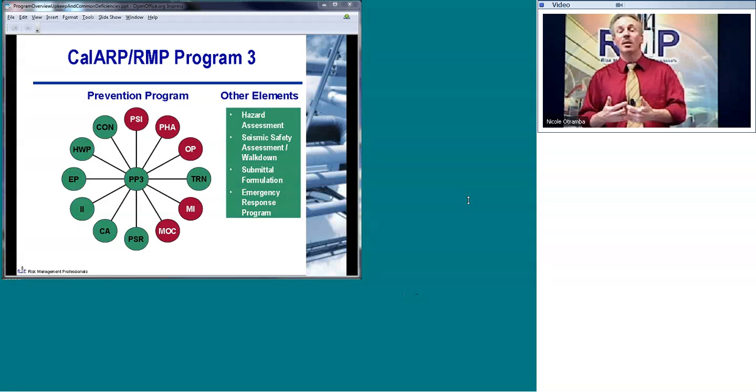I've also taken the liberty of highlighting certain elements in red that tend to trip people up most often: process safety information, process hazard analysis, operating procedures, mechanical integrity, and management of change are the things that get people into trouble the most. And we're going to go through all these elements and identify common deficiencies and things to really look out for, very common elements that trip people up and result in citations.

There's a significant overlap. In fact, recently I co-authored a paper with some of my colleagues here that provided an overview of the evolution of safety management system programs, starting with a lot of things that happened in the 70s and really came to a head with the Bhopal accident in 1984. And if you look at the evolution of what came out of that, the Center for Chemical Process Safety, which I had the honor of serving on for a few years, putting out their technical management guidelines for process safety, API Recommended Practice 750, and then finally in 1992, OSHA's promulgation of process safety management, and then in 1996, EPA's promulgation of risk management programs.

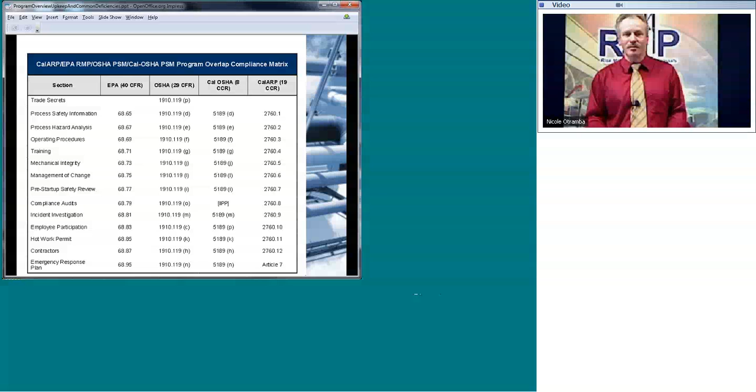I think it's worth taking a couple of minutes and identifying how we got here. Why do we have all these programs? A lot of you who may be fairly new to the process safety arena may not understand some of the background or the importance of these things. My actual foray into this field started in 1983 when I shifted from another group in Westinghouse to the process safety group, and we started applying a lot of these techniques even before the Bhopal accident or OSHA's promulgation of PSM. What you're really looking at is very significant events, catastrophic events in many cases that result in losses of many lives or significant impacts on the environment.

And whether you're talking about Bhopal in 1984, or the more recent Deepwater Horizon accident in the year 2010, a lot of things have occurred that have resulted in significant events, significant business impact. And it's really clear that there are fundamental flaws in many of those cases in how the application of safety management systems to manage the safety at the facility was actually done.

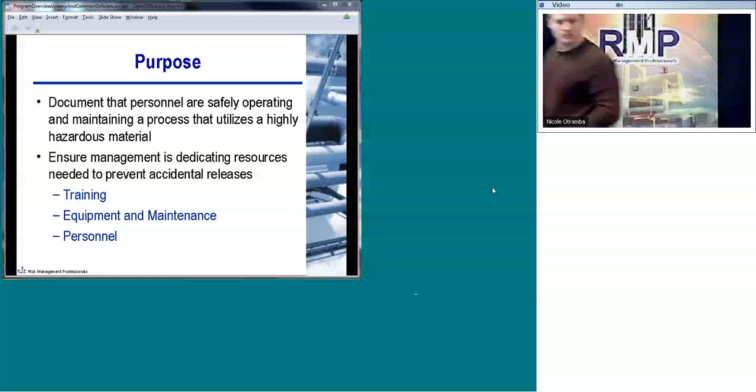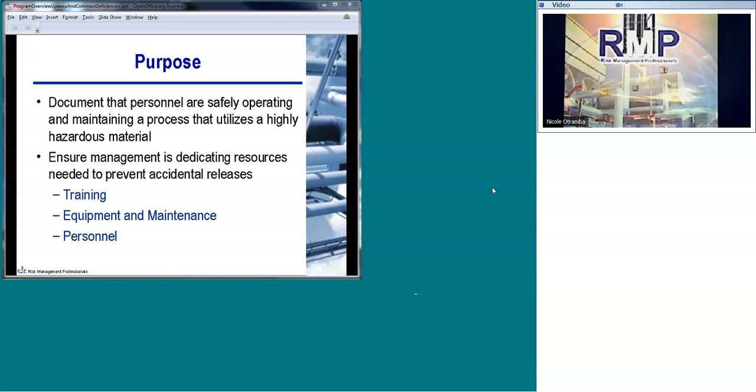Let's get rolling again. There's a mission here. All of the folks who are tuning in, if you're responsible for your programs, it's important to keep up with the programs and really for this primary purpose of protecting employees, the public, and the environment, and making sure that you're getting the necessary resources to do that from a training, maintaining equipment, and also personnel perspective. And that's what we're going to be focusing on today. So let's talk about upkeep requirements first.

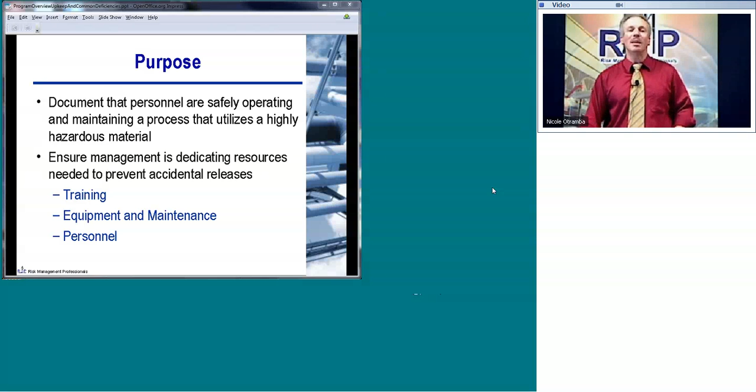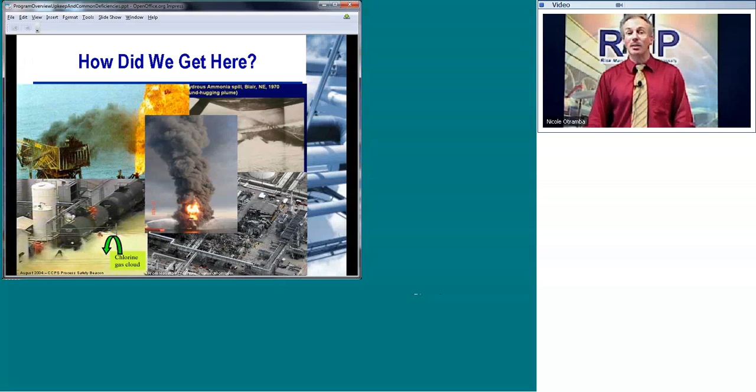Some of the key periodic requirements are every 5 years. As I mentioned, there's a requirement to resubmit. We'll also talk about some caveats where there may be some more frequent requirements under certain conditions. Every 5 years, you must update or review your hazard assessment to make sure that it's applicable. There's a requirement to review and update as necessary your hazard review, and that's the term used for program 2 for the fairly simple techniques, or the process hazard analysis if you're a program 3 facility. You're also required, if you're in California and subject to the CalARP program, to do an external events review, primarily seismic, as we discussed, with various guidebooks for seismic safety assessments, but you also must consider other external events.

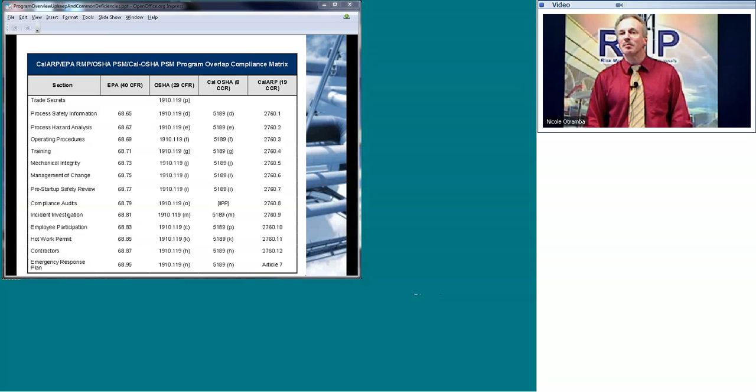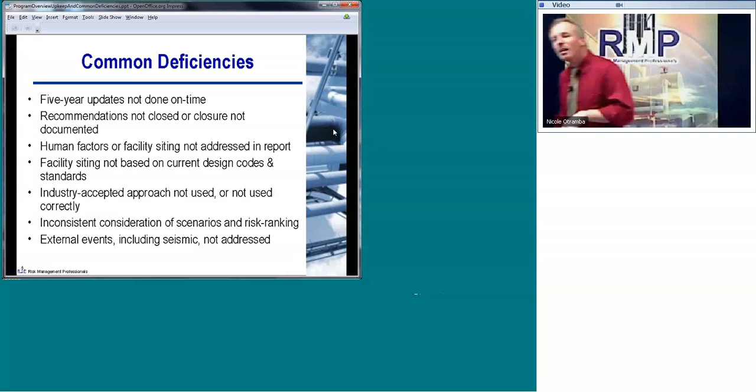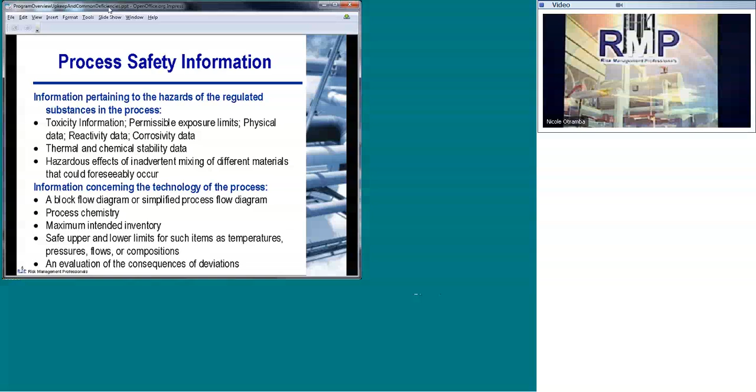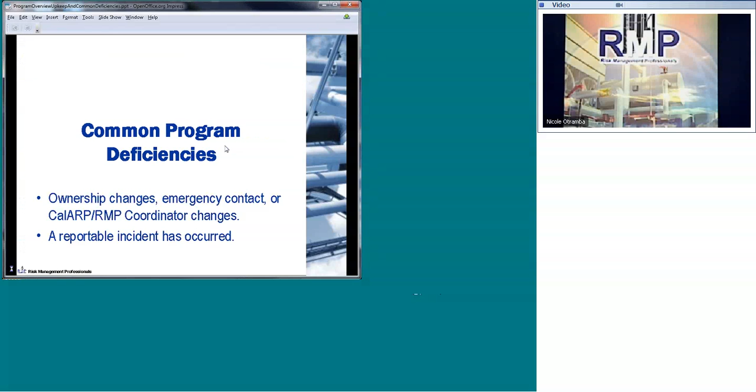Some more problems, Nicole? Well, the sound's okay right now. For some reason, your stuff's different than the one I have. So far, I've been able to find all the slides, but I don't see that slide. And I grabbed it from the February 24th folder drive. So I don't know. Are you? I'm going to go off mic for a second. Okay, we're going to take another 30-second technology break. Excuse me. All right. Are we live? Yeah. All right. Right now, hopefully you're seeing the same slide that I am. And hopefully your room is a lot cooler than ours. We seem to also be having some temperature problems here right now.

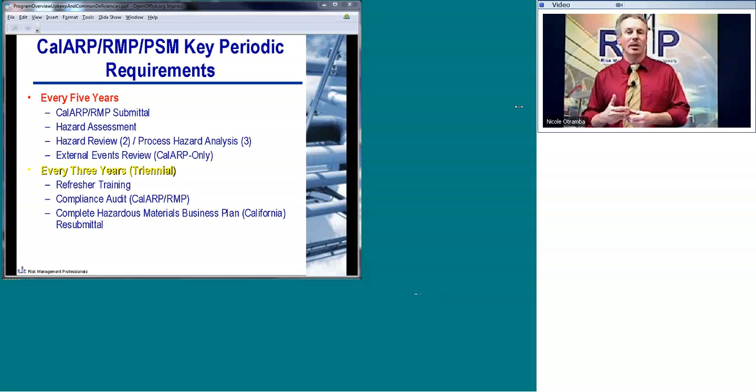Every 3 years, you need to make sure that you're providing refresher training to key personnel. As performance-based standards, they don't tell you exactly what training or exactly who needs to be trained. That's something that you need to define as part of your training program to make sure it's effective and meets the requirements and objectives of these performance-based standards. Compliance audits also need to be done every 3 years.

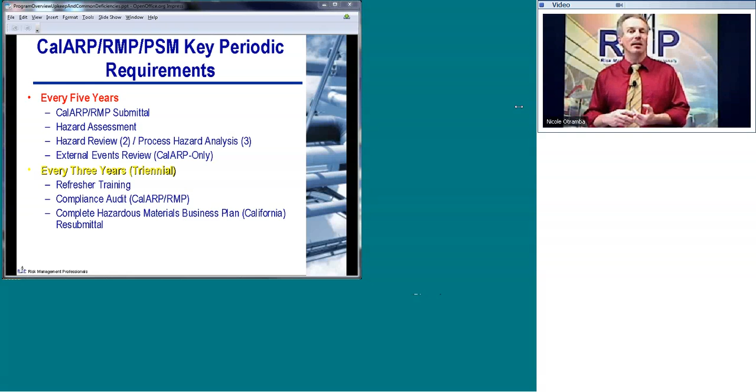A lot of people get confused and think that, oh, my regulators showed up and they did their compliance audit, so I guess I don't need to do mine. Not true. If a regulator shows up, they've got their own mission. They can show up for half an hour and do a quick walkthrough. They can stay there for 30 days and do a detailed assessment.

But that's still their mission. It's your responsibility to monitor the health of your program and make sure things get done. That's the objectives of the compliance audit.

It's on a 3-year cycle, which is totally different from the 5-year cycle that's being done for hazard review and process hazard analysis. So even if you just updated your CalARP RMP submittal last year, if your audit was done 2.5 years ago, it's time to start thinking about auditing your program and making sure that you've verified the adequacy of implementation and that it's effective.

And also in California, there's a requirement for hazardous materials business plans to be resubmitted on a triennial basis. Annually for these programs, operating procedures need to be reviewed and certified as adequate. Emergency action plans or emergency response plans, they also need to be updated. They certainly need to be reviewed. The timing is a little bit looser, but best practices, and there's some general requirements for updates on an annual basis. And also hazardous materials inventory updates may be required on an annual basis.

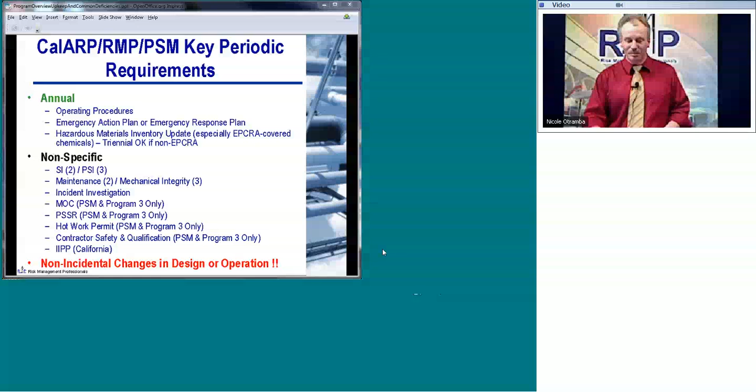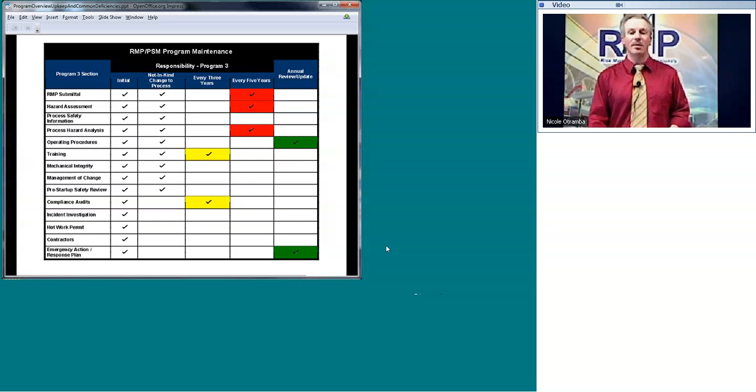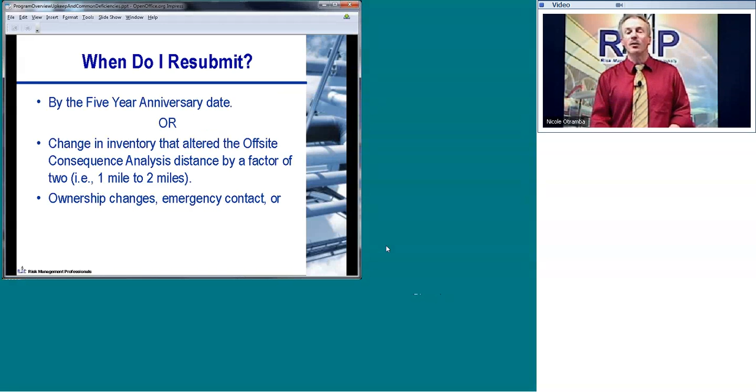So let's talk about the different elements and some of the common deficiencies associated with those that you'll want to look out for. First of all, for the submittal, you want to make sure that the submittal gets done by the anniversary date. If there's a change in inventory that affected your off-site consequence analysis by a factor of 2, you're also going to have to do a resubmittal. Ownership changes, emergency contact points, CalARP, RMP coordinators, the EPA, your CalARP coordinator, and your local CUPA want to know who to talk to, who to contact in an emergency. So as those things change, they'll need to be promptly notified.

A lot of these things have a 6-month clock. For a lot of these things, the amount of effort to change them is fairly small. You'll definitely want to be responsive. Keeping your CUPA happy, keeping them informed is a good way to maintain that positive relationship that will help improve things at your plant site and make it easier for these regulatory programs. And of course, if you have a reportable incident, you may have to do a resubmittal.

Let's talk about the hazard assessment elements. The off-site consequence analysis for Program 2 and Program 3 facilities includes worst case and alternative scenarios. Only the worst case scenario needs to be looked at for Program 1, but we're not really focusing on that for this presentation. And in general, you'll want to use EPA-approved dispersion models for hazard assessment, and make sure that you've got a report where you can find things and update them fairly easily.

What just flashed on your screen is a little picture of RMP Comp. That's an EPA-approved software package, very easy to use. And although it tends to overpredict consequences for toxic gas releases and also for flammables, it's EPA-approved and certainly errs on the conservative side. So if it works and if it doesn't impact what you do at the plant site, why fix what isn't broken? It's very easy to use, and it's, like I said, very defensible.

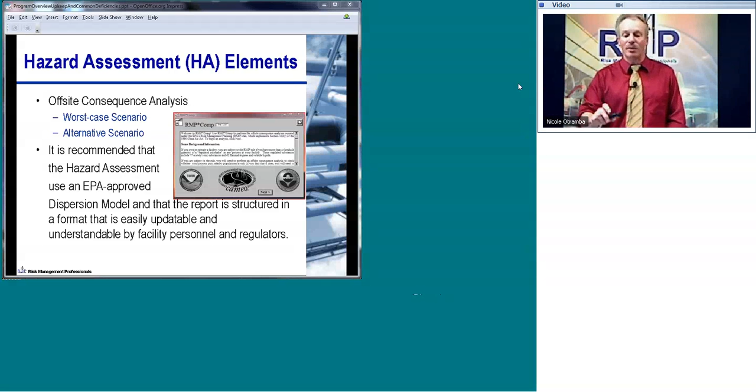So let's take a look at some common deficiencies here. Not getting the submittal done, that's pretty basic, but a lot of people, the dates slip. At the plant site, they have a change in coordinators. The new person comes in, they put PSM or RMP coordinator in their resume. The hiring manager gets them in, and they're all excited. They got a PSM coordinator. A lot of times people don't know what they're doing, and they're getting into this kind of fresh. And if they don't have all the records, if they're not watching what's going on, it's really easy to miss these submittal dates.

Also, not having a management system in place. Having specific written assignments of responsibility is critical. That's one of the things that people are going to look for if they come in to audit your facility. If a regulator comes in, they're going to want to know who's in charge of programs and how you are monitoring that the things are getting done.

For the hazard assessment, common deficiencies: not documenting your basis for scenario selection, and also failing to update populations, sensitive receptors and maps on revalidation. Those are common deficiencies, real basic things. They tend to slip through the cracks, and a lot of people tend to miss them.

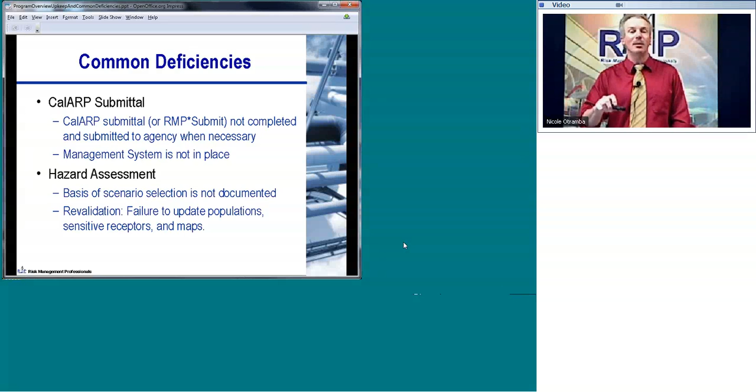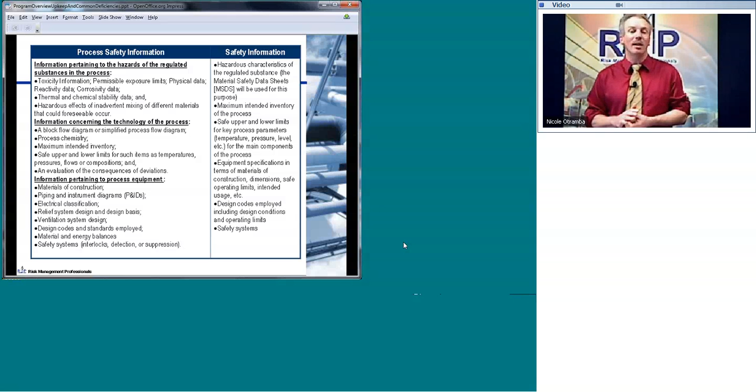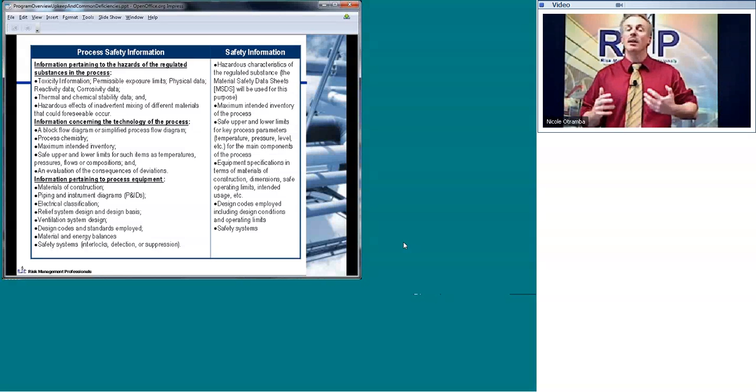Other process level information: materials of construction, P&IDs, electrical classifications, relief system design and design bases, ventilation system design, design codes and standards that are used, material and energy balances, and safety systems that are applied in their design bases. These are things that are very fundamental. A lot of times they don't change a lot, so once you compile them, you're in pretty good shape.

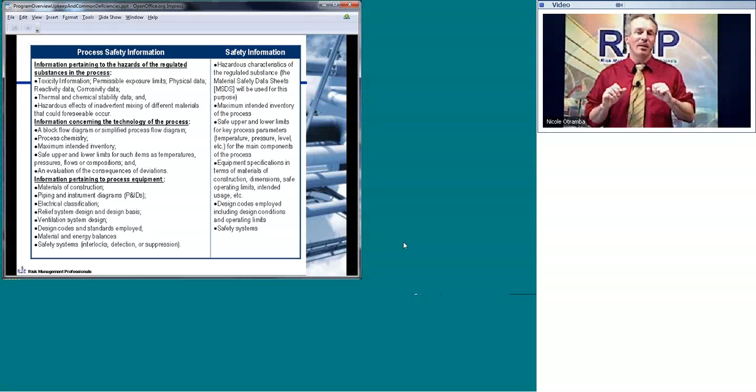But if you change out a relief valve, if you redesign, repipe your process equipment, you may need to revise set points, operating procedures, P&IDs, or anything else that is associated or has in it key process safety information. So you need to have a management program for making sure this is updated so the people who need this information have it and that it's current.

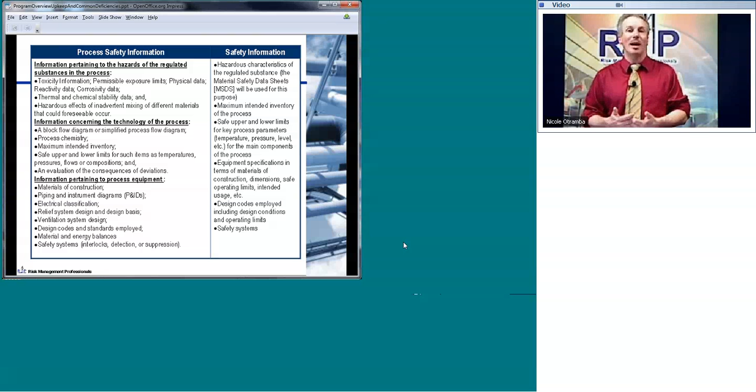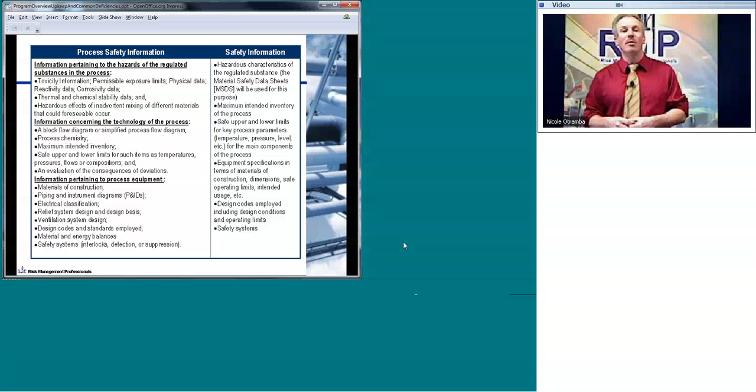Keeping up with this stuff for many facilities where changes are being made can be very non-trivial. It can require a lot of effort. If you're in charge of managing these programs at your facility, try not to underestimate the amount of your personal time and/or resources that may be necessary to keep up with these things.

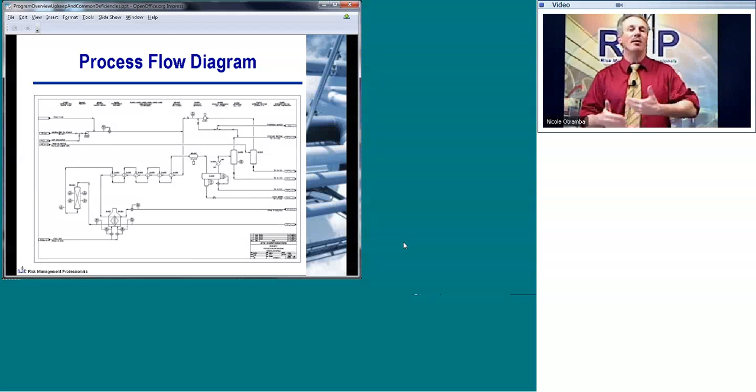A couple of quick examples that I put in your package of a process flow diagram. It's meant to give somebody an understanding at a glance of where all the hazardous materials are, general inventories, types of equipment they're in, and how this process works. In more detail, P&IDs, and I provide you with a little example there, they have more information about set points, component IDs, design pressures, etc.

A lot of people ask, well, what goes on a P&ID? In fact, we've actually given frequent P&ID and process safety information classes that we've done by webinar and also in person. A lot of people do ask these things, but it really depends on what you need.

And you've got to decide at the plant site, although there are a lot of standards, there's ANSI standards and things like that that allow you to determine what goes on a P&ID. It's really meant to be the embodiment of the kind of information you need when you're evaluating hazards at the facility. And that's where the rubber meets the road, is what goes into a P&ID. It should encapsulate all that basic information so that if you're doing a process hazard analysis, most of what you need is in front of you in a form that shows the interrelationship of these various safety characteristics.

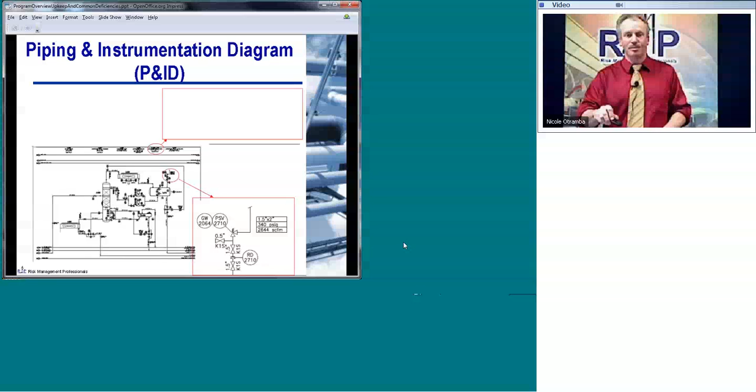Common deficiencies associated with process safety information. P&IDs not updated, not there, not reflecting changes that have been made to the system or are not complete. I have to tell you that after doing this for 28 years, kind of, sort of, I have never seen a P&ID that's 100% accurate. Now, usually when I start a HAZOP study or a process hazard analysis, the minor errors are small enough so it really doesn't affect what you're doing or the ability of the team to work on it.

And one of the spin-offs of the PHA or HAZOP study is actually marking up the P&IDs and getting these folks together to make sure they're current. This is very important to be done right. It's a critical part of your process safety information. It's hard to do. A couple minor glitches here and there probably are going to be inconsequential.

But you know, if you're having complete missing drawings, if they're totally inaccurate, or you didn't field verify them, and you start your PHA, I can guarantee you that you're going to spend more time and aggravation and wasted effort, especially if you're hiring a consultant to come in and facilitate your HAZOP study, in trying to work around big chunks of missing data than if you just spent the effort up front and updated the P&IDs.

Second bullet, not filing, managing, or being able to locate key process safety information. Regulator shows up at your plant site and they want this stuff. If you can't find it easily, they've got to ask, well, how valuable is that? How much is it used? How good is it in terms of its effect on your program? Relief system design or design basis not documented, that's very common. Easy citation there, and a lot of times they don't change very much. It's just a matter of filing it properly, being able to locate it.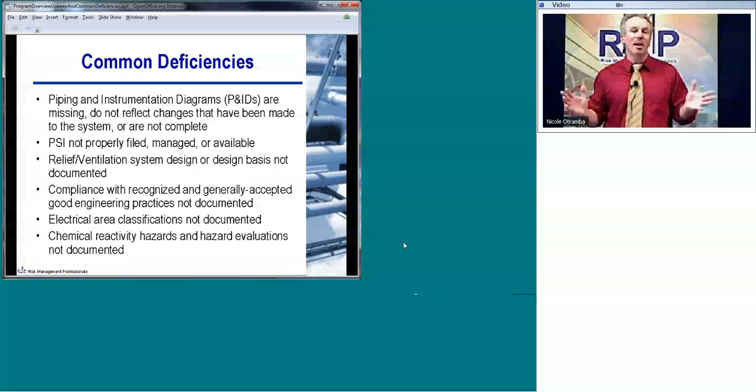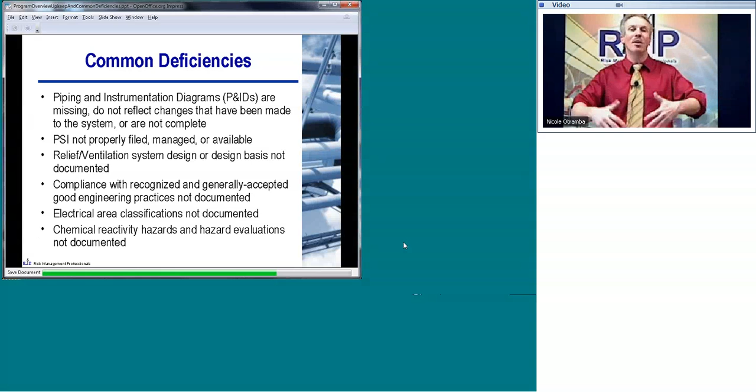For all this process safety information and various elements, we usually recommend, or we set up for clients, an electronic universe, if you may, of something on your local area network where you've got certain directories that are key to these various elements of PSM and RMP and CalARP, where all this stuff is pigeonholed. If you've got large copies of paper documents, gosh, an accident, somebody misplacing them, accidentally throwing them away, you want critical information scanned and also archived electronically, and good backups made of these electronics. Even though it's a lot to do, there are ways to handle this properly.

And again, we usually recommend doing something that makes it very easy to find and also archives it very thoroughly. A lot of things that we do too, most of you use Microsoft Office as an interface. It's really easy to set up an HTML hyperlinked front end that actually links into these documents. And gosh, if the regulator comes in and you can put your hands on this information very quickly, they're going to feel real good about your program, and your audit is going to go a lot smoother.

Fourth bullet, compliance with recognized and generally accepted good engineering practices has to be documented. Electrical area classifications not being documented is very common. That's something you may want to get on top of. And also chemical reactivity hazards, if they apply to you, and also various hazards not being documented.

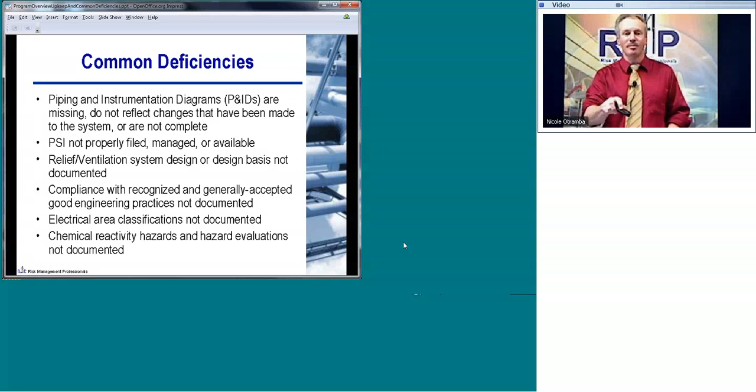So what I'd like to do with all these, and it's a little difficult to do with a webinar, is run through a quiz that we would give if we were doing this at a plant site and point out a couple of key elements. Process safety information being up to date prior to conducting the process hazard analysis, absolutely true. You want to make sure this stuff is up to date. Any effort you spend beforehand in field verification, double checking the drawings, and making sure P&IDs and other PSI information is up to date will save overall time and effort in the long run. Second item, material safety data sheets can be used to meet all process safety information requirements.

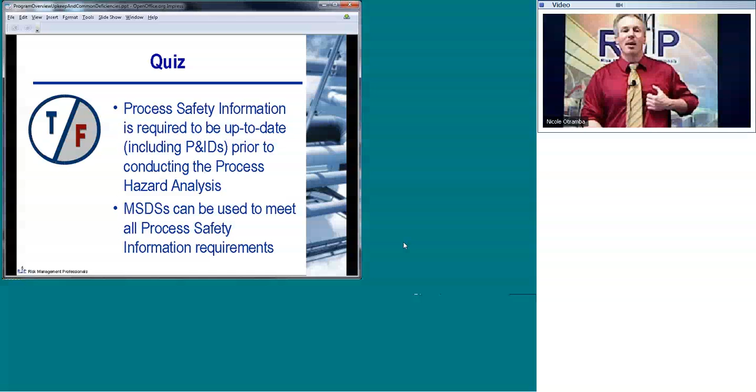Absolutely false. MSDS, good information, but it's just one element of a lot of the things that are required for PSI. So let's talk about the process hazard analysis and hazard review. PHA is for Program 3, hazard review for Program 2.

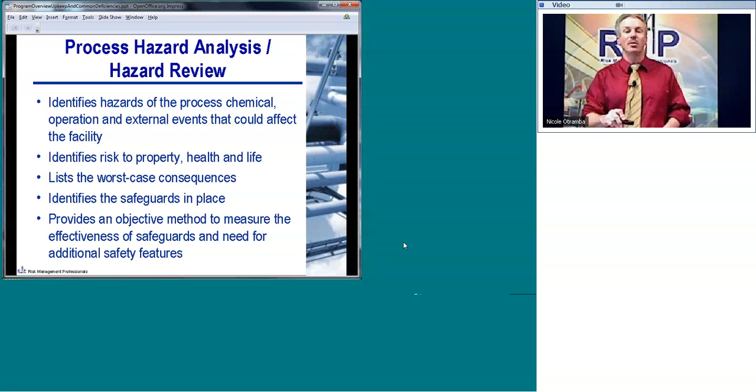Objectives: identify hazards of the process chemical, operation, and external events that can affect the facility. Look at risk to property, health, and life. List the worst case consequences, identifying the safeguards that are in place, and making sure that you've got an objective method to measure the effectiveness of those safeguards and make a determination for additional safety features. These are usually done as part of a team.

Now, the type of approach is very flexible. I've put together a spectrum of the kind of PHA tools that you might see applied. On the left, you'll see things that are much less effort, but don't really yield the insights of more complex tools. Less effort, fewer insights for a simple process may be just fine. So if you get a very simple process, a what-if approach or checklist approach, it may be just fine.

If you got a more complex chemical process, something like a HAZOP study, or if you're trying to make the tough decisions on the adequacy of your safeguards, even applying a layer of protection analysis or limited and focused applications of quantitative risk assessment like fault trees or event tree analysis might be very useful. I used a lot of conditional words there. In the wrong hands, LOPA, fault trees, quantitative risk assessment can be a nightmare. If it's focused and meant to address specific problems and specific decisions, they can be very helpful and very effectively applied.

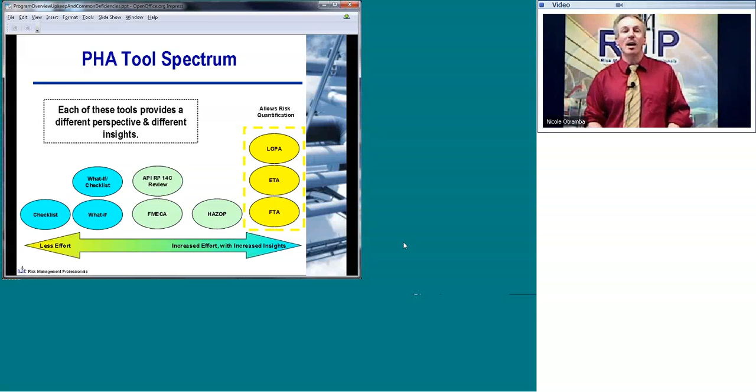Okay, common deficiencies for the PHA. Not doing 5-year updates on time. A lot of times, too, people play games. A PHA might have been done in February 1993 and documented, and the report's dated in August 1993 because somebody got busy and didn't do it right away. Well, August 1998 is not the time for your next update. You really need to key it on when the team meetings were done because that's the encapsulation of when you actually did the analysis. So making sure these 5-year updates are done on time; it's an easy citation and easy for a regulator to check if it's not done.

Recommendations not closed or closure not documented. If you've got a recommendation from a team in terms of how to improve safety and you don't follow through with it, like I mentioned the term smoking gun before, it's an easy citation that can be picked up to have open action items like this.

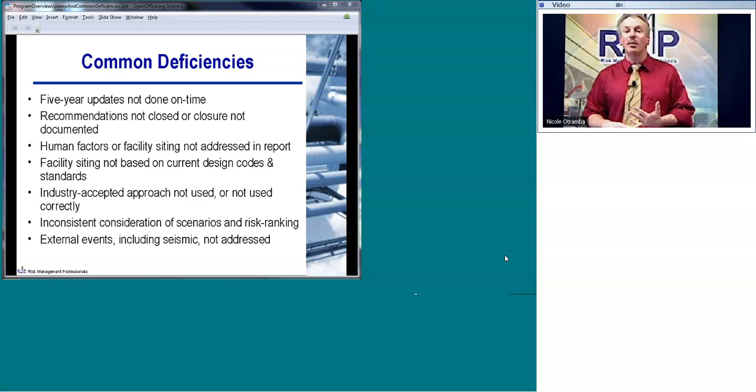Human factors, facility siting not addressed in the report, facility siting not using current design codes and standards, not using an industry-accepted approach for your hazards analysis, inconsistent consideration of scenarios and risk ranking, or not risk ranking at all, is something that a regulator will often pick up on, and also not addressing external events, and especially for California seismic, that's a common deficiency.

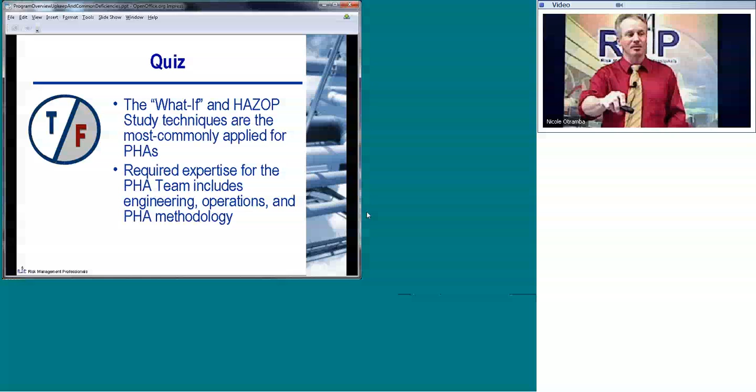Other things to think about for PHA: closure of the PHA recommendations is the responsibility of the facility, and the auditing agency would typically not be inquisitive as to status. Well, two parts to that. First part is true. The closure of recommendations is the responsibility of the facility. You're not waiting for the regulator to show up and verify and have that person help you close recommendations.

And when they do show up, they are going to be inquisitive, very much so, as to what you did with those recommendations. Coming in from the outside, they're not going to know as much as you do about your program, about your plant, so they're going to want to rely on what a team of experts identified, what conclusions they came up with, and then how you handled those findings.

Second bullet on the slide, PHA revalidations are required at least every 5 years. That is true. A revalidation, a minimum 5 years if nothing's changed, more frequently and maybe even infused into the management of change process if there are a bunch of changes.

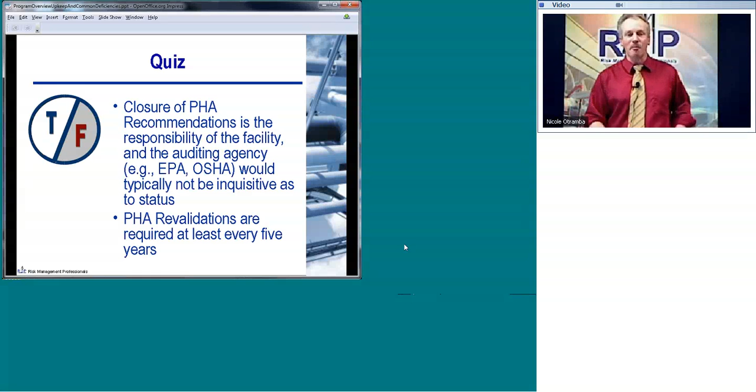Let's talk about operating procedures. There's a number of procedures that are necessary to handle different operating modes. Initial startup, normal operations, temporary operations, emergency shutdown, emergency operations, normal shutdown, and startup following turnaround. All these things need to be addressed at your facility.

Now, can you combine them? Can different operational steps apply to different operating modes? Absolutely. But not having these things identified and not dealing with them in the operating procedures, people wonder whether or not you really thought about it or are telling the operators how to deal with these kinds of operating modes.

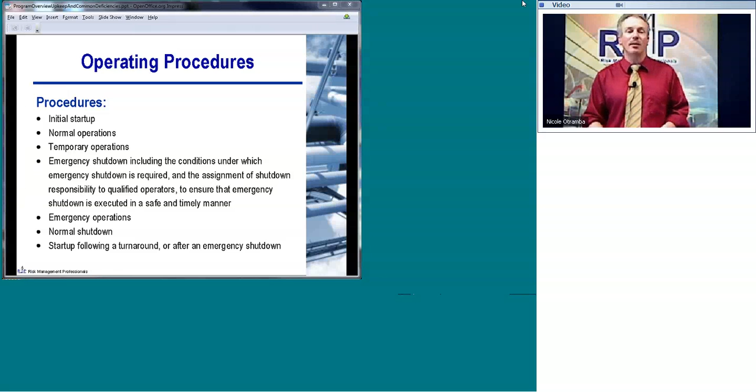Operating limits, consequences of deviation, steps required to correct or avoid deviations need to be included. Various safety and health considerations, like material properties, precautions to prevent exposure, and also various control measures if there is contact or if chemicals are released, are very important to include in operating procedures. These things are important and will be looked at during an audit by an outside agency.

Common deficiencies for operating procedures: the procedure is outdated, or you haven't performed your annual review and certification. Just reviewing it is one thing. Most of the time there's a sign-off sheet right in the front by somebody in a responsible position that it was reviewed and certified to be current and adequate.

Second bullet, written procedures not synchronized with operator actions. I don't know how many times I've been to a plant site and, when you're spot checking or looking at some of these key PSM elements, you get a copy of the operating procedure in your hand, then you have the operator actually show you what he or she does, and they're not the same. A lot of times the operator gets the procedure and goes, like, I know what I'm doing anyhow, and just kind of ignores it.

What you want to do is have the operating procedures capture those best practices from your personnel. Why do you want to do that? Consistent application of best practices is going to be safer. And from a selfish perspective, if you're a business, if you got an employee who's retiring soon, you want to capture those insights in how to operate it efficiently, effectively, and safely, and get them into your operating procedures.

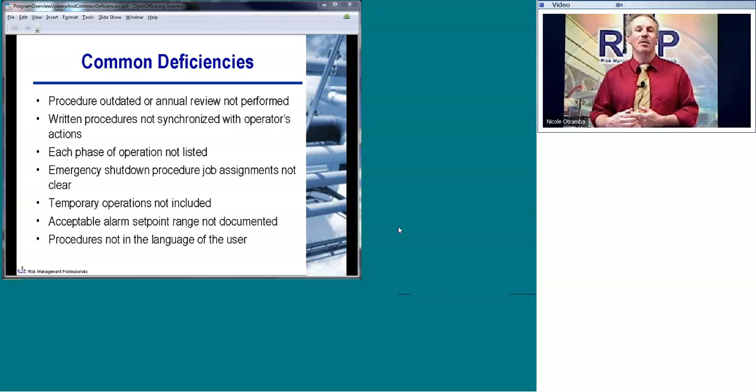Third bullet, each phase of operation not listed. Common deficiencies: emergency shutdown procedure job assignments not clear, temporary operations not included, acceptable alarm set point ranges not documented, or procedures not in the language of the user. Now, if you've got a bilingual or multilingual staff, do all procedures need to be in all languages?

No. What you need to do is verify that you're meeting this performance-based standard, that they understand how to operate it safely. That can mean that you keep the procedures in English and help them with their language skills, or it could mean that you may want a couple of different flavors of procedures depending on language requirements. In fact, we've done that at some facilities in California. Actually having procedures only in Spanish makes sense, and that's manageable.

So let's do a little quiz here. If there have been no changes to the system, there's no need to certify operating procedures each year. False. Whether there have been changes or not, you have to have somebody sign on the dotted line that they've looked at it and that they're adequate.

Contractors are not required to follow the facility operating procedures. False. A lot of times, contractors and plant personnel, other than the uniform they may wear or the Nomex they may put on, are basically interchangeable or doing very similar things. If the procedures need to be followed by operators, they need to be followed by contractors too.

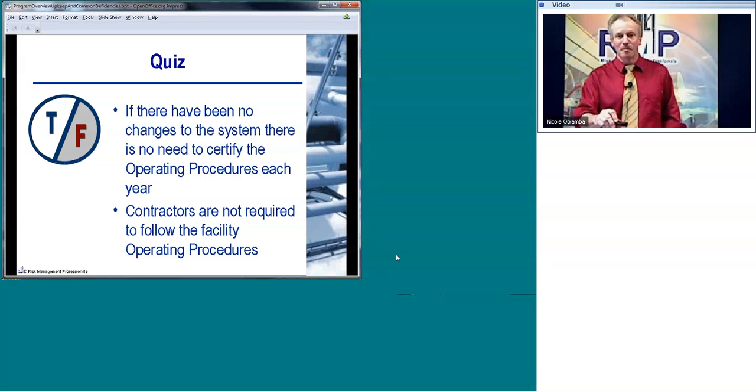Let's talk about training. Training has to address operating procedures and various safety, health, maintenance, and emergency response issues. You need to make sure that training includes safety and health hazards, emergency operations, safe work practices, safety systems, operating limits. And the records, let's keep that in mind. The records have to identify the individual who's trained, the date of the training, and how you verified that they received the training and understood it. Basically, comprehension training.

Common deficiencies for training: documentation that demonstrates that training is performed is not available. Auditors and regulators are going to be looking for that. You want to keep really good records of training. Training records don't include the means used to verify the employee understood the training. It's one thing to go through and send them to a class. Did they understand what was going on, or did they just sleep through it and not really get what was

going on? PPE, procedures and training documentation not available. Training not in the language of the user. Again, performance-based standard. Training, procedures, all these things need to be understood and acted on properly. And also training not encompassing maintenance procedures.

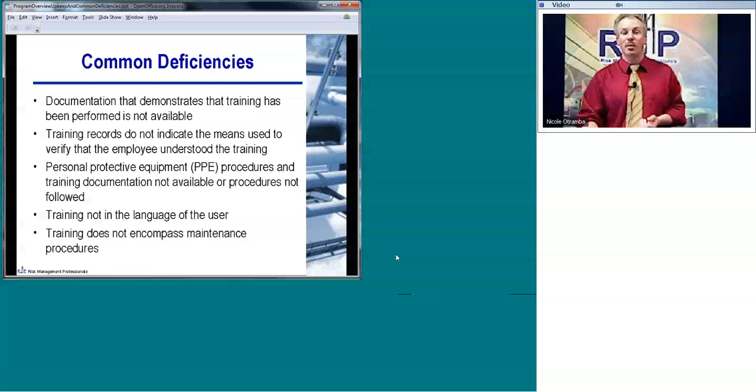Let's go over a couple of key points. Refresher training on the applicable facility operating procedures is required every 3 years. True. Training records should document the means used to verify training comprehension. Absolutely true. You need to have some mechanism. It doesn't have to be an extensive 5-day test.

It can be that they walk around the plant site and you're actually working with the operator and verifying by visual observation, and a supervisor or more experienced employee signs off. Lots of ways to do that for a performance-based standard, but you have to have some mechanism that you validated is adequate.

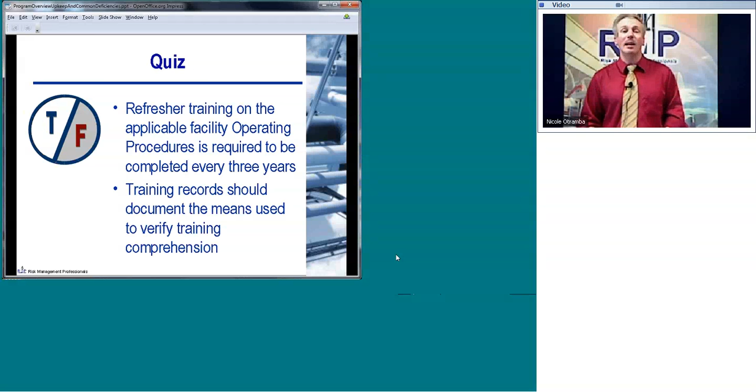Let's talk about mechanical integrity programs for Program 3 or maintenance programs for Program 2. All of these describe the process and safety equipment, preventive maintenance activities, and inspection schedules. So inspection, testing, maintenance, key things that are necessary for all these programs.

One of the things you can do, you can go home and have your sprinkler system in your yard break or be operating sporadically. That's your business, and it's a low hazard kind of issue. For a highly hazardous facility, a fix-at-failure maintenance strategy is not acceptable. Well, it's not acceptable for at least equipment that's associated with the hazardous materials and/or critical safety systems.

You have to have some program to verify or validate how much effort is needed and when, and have a mechanism for going through it and verifying that it's reliable and that the equipment's available when needed. You have to have a preventive maintenance program based on manufacturer recommendations.

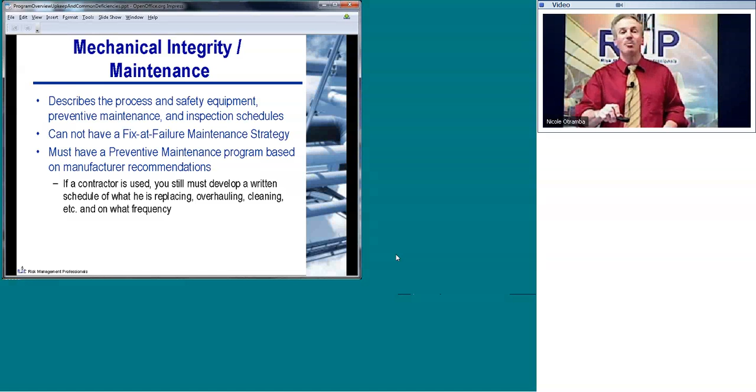Excuse me. And if you're using a contractor, you must develop a written schedule of what they're replacing, overhauling, cleaning, and at what frequency. So even as a facility owner, even if you task out maintenance, you've got to keep records and make sure they're doing the job properly.

This slide is a little busy. This emphasizes the fact that there's lots of ways to skin the cat here. There's lots of different mechanical integrity programs and how you implement it. Simple on the left is memory, freestyle. In a lot of cases, it's just not adequate anymore.

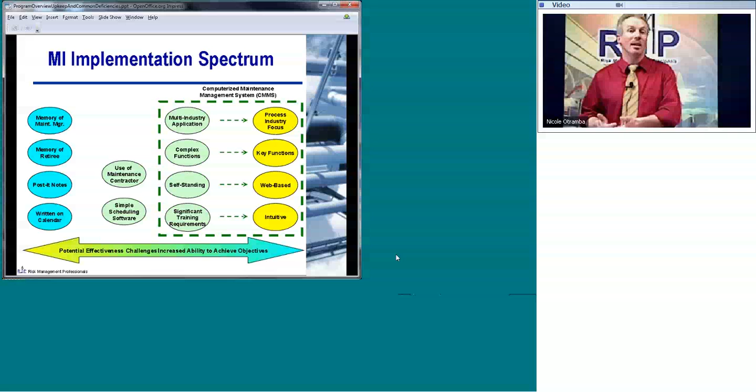On the right, you're looking at computerized maintenance management systems, which is where most programs have evolved into, and a lot of them are computers at the plant site, a lot of times using very expensive software. A lot of the more effective programs are web-based and retain the documents in an archive form and do a lot of hand-holding to make these things very easy.

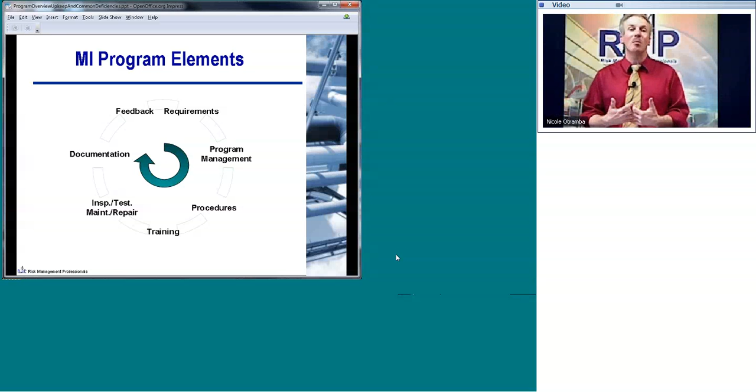On the other hand, some equipment that breaks down a lot and requires a lot of attention may need inspection or maintenance much more frequently. So again, performance-based standard, you're devising your mechanical integrity program to reflect the equipment and what it's trying to do.

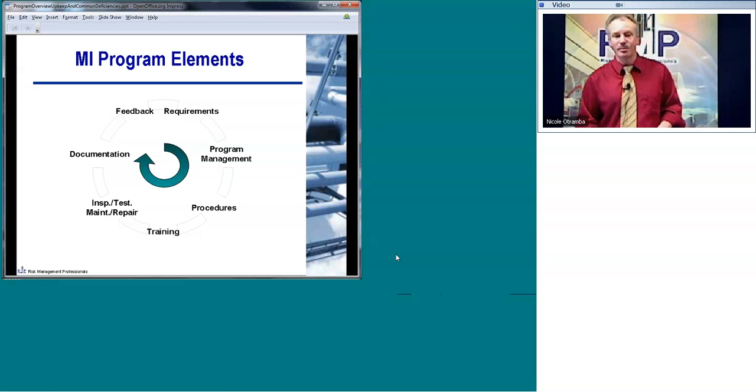Common deficiencies: written procedures not being available, not complete, or not implemented. Inspections or maintenance not occurring at the frequency consistent with industry standards or best practices.

Come back to that in a second. Equipment deficiencies not corrected in a safe or timely manner. If something's broken and you just go like, okay, we'll leave it broken for a while, that's not acceptable. I'll give you a good example.

I was walking through a water treatment facility that was using gaseous chlorine. It was located in a building. They had a caustic scrubber on the outside, and we actually did a full HAZOP study, and we kept crediting this caustic scrubber as a recurring safeguard that was very, very important. Well, I usually like to do walk-downs as part of the HAZOP study whenever I facilitate.

So we went for a walk-down, and as I was walking past the building, I looked down the pit, and here was the main caustic recirculation pump disassembled. And I said, wow, how long has that been like that? Oh, about 4 months. And basically they weren't correlating the fact, and I said, well, is that acceptable? He said, well, it never runs. And so several things there.

First of all, it never ran means that they weren't testing it to make sure it was functional. And secondly, just because it's a standby piece of safety equipment that's not normally operating, like a relief valve or this caustic scrubber, doesn't mean you don't need to make sure it's 100% reliable and there when you need it.

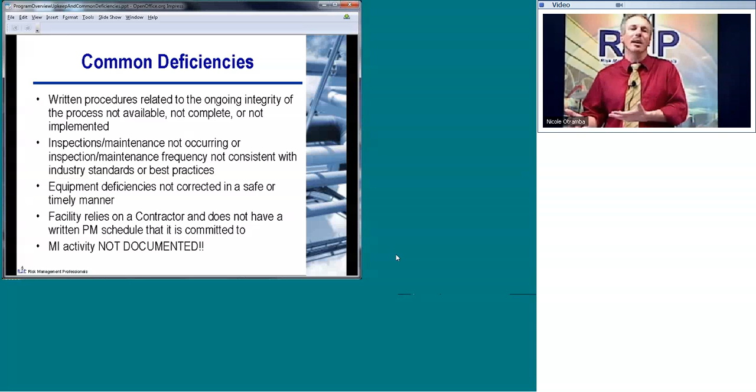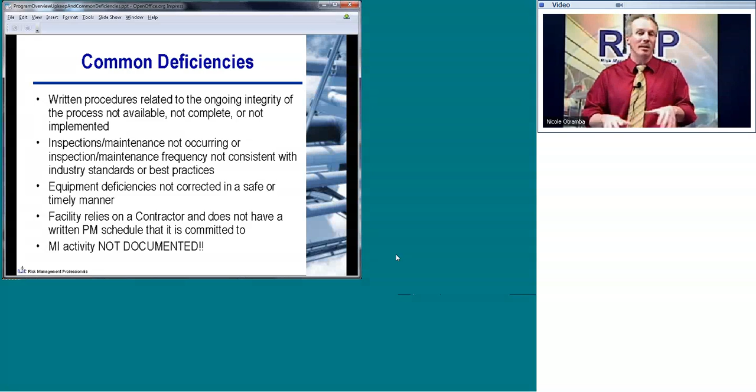This is an area that a lot of people get cited. That second bullet where you're not doing your inspections or maintenance on a frequency consistent with industry standards or best practices, it goes beyond that. If your own program said that you should do something every 3 months, and you're not doing it every 3 months, and there are records there to verify that, that's an easy citation for a regulator coming in.

A couple of key points. A relief valve is one type of equipment typically encompassed by mechanical integrity programs. Absolutely true. It's one of your key safety devices for overpressure protection. A PHA is another PSM RMP element which can provide a basis for the mechanical integrity program.

Absolutely true. When we set up mechanical integrity programs, we'll look at what safeguards are credited, we'll look at what causes trigger significant events, and we'll look at the risk ranking and how bad the consequences are to fold that into importance values for your mechanical integrity program. And if you've credited a key safety feature in your PHA and you don't have some mechanism for validating reliability in your mechanical integrity program, that's an easy gap that could result in a citation.

Third bullet, mechanical integrity is a regulatory requirement of RMP Program 3 facilities. Correct. Maintenance is the term for Program 2. Fourth bullet, mechanical integrity program and its implementation must be documented. Absolutely true. Computerized maintenance management systems, that's what CMMS stands for, must be used for mechanical integrity program implementation.

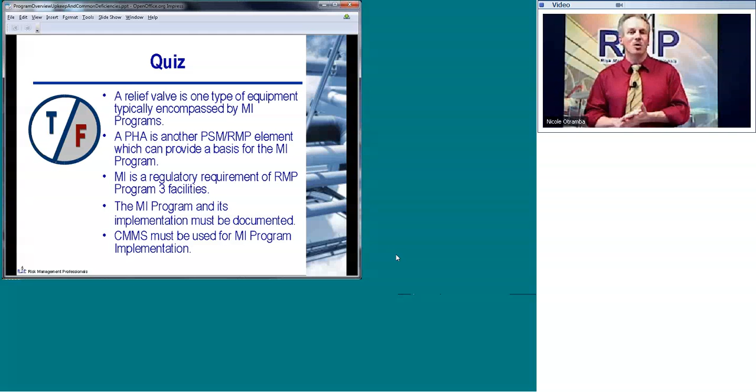No, it's not true. Although most people do now, it's kind of considered best practice, and it's actually much more efficient in terms of staying on top of your program. It's a performance-based standard, so however you do it, if you've got a paper mechanism for doing that, if you've got a master calendar where you write in when things need to be maintained, as long as it's effective, that's what these performance-based standards are all about.

Management of change, it's designed to make sure you have a safe and systematic method for monitoring and managing changes to the process. You're identifying the technical basis for the change and making sure the changes have been designed using best practices. You're making sure that modifications to procedures also address changes to process safety information and that all the documentation has been updated. And you also want to make sure any of these changes get communicated to employees that may be affected. Who's an affected employee? You've got to decide, but you've got to at least think about how this impacts folks.

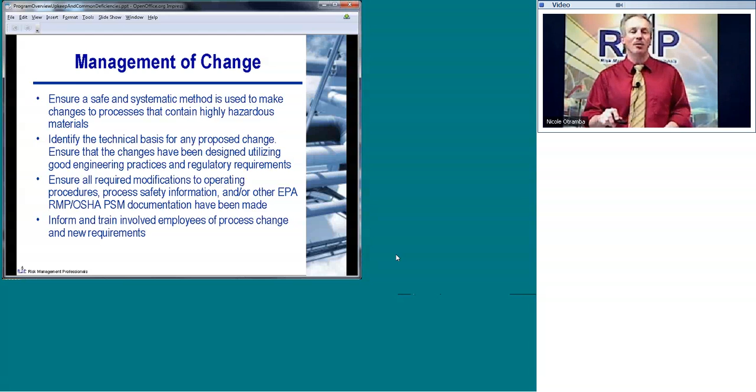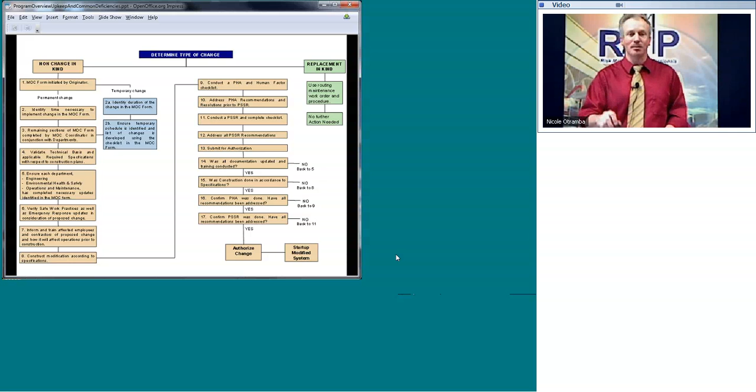This is a very busy slide that is for your reference only, that identifies an overall flow chart for how to do management of change. Common deficiencies for MOC: not having a procedure, it not being current, or not using it. Happens a lot.

You know what? Make sure that it's part of your culture. Another part of this is usually PSM Overview Training is a good idea annually, just to keep these programs fresh, because process safety management, CalARP, and RMP, more than a lot of programs, really affect a wide range of employees. And what's the biggest element that affects most people at a plant site, whether they're in an office or out in the field? Management of change.

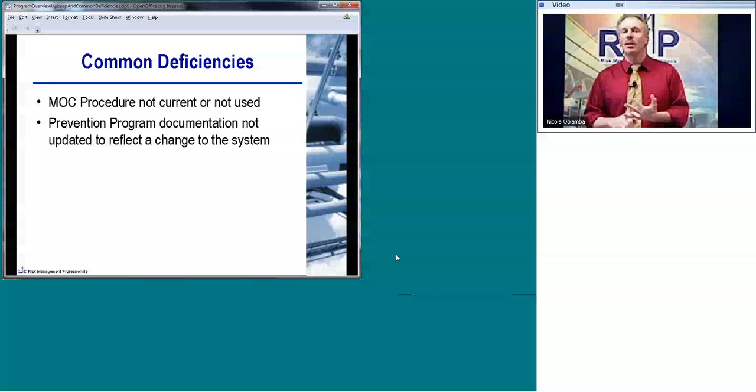Everybody's got to be looking out for changes to the organization, to the equipment, to the process that are not in kind. Basically, things that are different from what you're doing, and be thinking about, hey, this impacts the management of the program. Hey, this impacts the safety of the equipment. Okay, everybody should be thinking about that. So when we do annual PSM refresher training, we usually emphasize the MOC program.

Second bullet, prevention program documentation not updated to reflect a change to the system. It's a lot of work. Okay, let's be direct about this. It is a lot of work, but you've really got to think about what documentation is updated and follow through with it.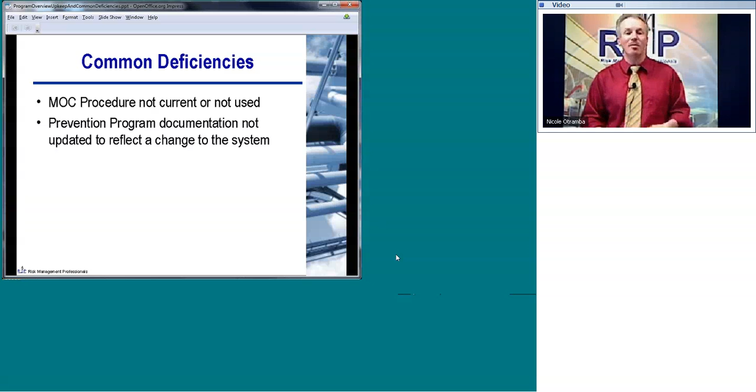Key thing, as part of the MOC process, employees and contract employees whose job tasks are affected by the change must be informed and trained in the change prior to start of the process or affected part of the process. A lot of words there, absolutely true. You've got to go through and make sure all the repercussions of this percolate through your PSM program and to employees.

Talk about pre-startup safety review. It's conducted for all new process construction and modified processes to make sure the system is safe for initial and continued operation. You confirm that elements of the MOC process have been completed, and you ensure that recommendations have been closed prior to startup. You're going to see this issue again. Recommendations. You're going to see this come up over and over again, and you'll see why in a few minutes.

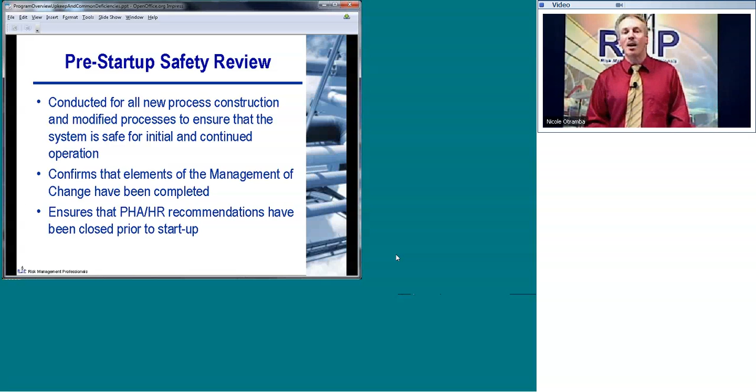Common deficiencies for PSSR: not having written procedures, not completing the documentation, keeping it on file, following the implementation of MOC, and not completing it and signing off until after startup. There's a little bit of give there. That's not always a citation item, but if you don't do it on the spot and before startup, a lot of times it just never gets done, and people have got to wonder how seriously you're taking your program.

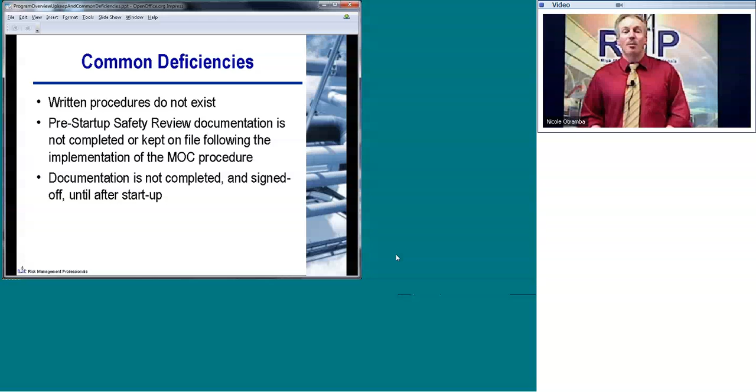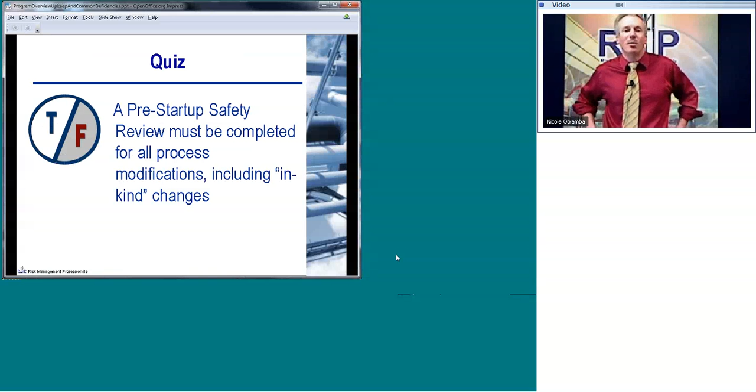Pre-startup safety review must be completed for all process modifications, including in-kind changes. That's absolutely true. Even if you're doing an in-kind change before you start up, you want to run through your PSSR checklist.

Compliance audits. PSM and RMP have nearly identical requirements for this. You've got to certify compliance every 3 years, document findings, address deficiencies, retain 2 of the most recent audit reports, and you want to make sure that you can address this by developing checklists for technical compliance and the effectiveness of implementation. It's not about just checking the box, do you have an operating procedure? Do you have a mechanical integrity program? The compliance audit is about evaluating its effectiveness.

One of the interesting things, for those of you who are in the offshore facility business, like offshore oil platforms, there is basically an analog to PSM that's just been promulgated called SEMS, or Safety and Environmental Management Systems. What they did when they promulgated that is they looked back at a lot of the problems that people were having with PSM and RMP programs with these 5-year cycles, 3-year cycles, and annual cycles, and they simplified a lot of them, unfortunately, in favor of the more frequent, or the program itself, or the regulator, if you may.

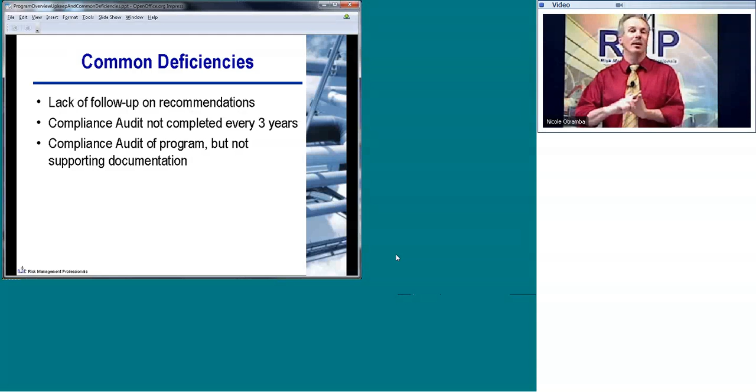Basically, they synchronized the hazard review, submittal, and also the audit to be 3 years, so people wouldn't get confused, because this does cause a lot of problems. People lose sight of, okay, what part of the cycle am I in, and they don't do their compliance audit. And it's the year 2011. For those of you who did their initial submittal in 1999 and stuck with the compliance audit schedules every 3 years, with their first compliance audit in 2002, next 2005, next 2008, 2011 is the next audit cycle for a lot of folks. And the regulators are getting a little more aggressive.

When they start looking, they're going to find a lot of people just miss this because they get confused about the cycles, personnel turnover, and they have a hard time managing these kind of things, which we talked about with management issues earlier. Third bullet: compliance audit of the program, but not the supporting documentation. You've got to look, you've got to dig. What we do for compliance audits is what most folks do too. You do a broad brush of everything, and then you really drill down into key areas to make sure things are done properly.

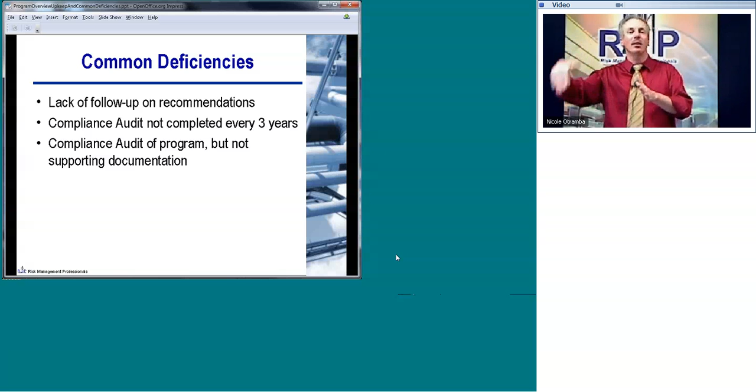Incident investigation. I really hope you never have to do this. But if you do, you've got to make sure that any incidents are investigated and reported, including near misses. What's a near miss? Something that could have occurred and propagated to something much more significant. Well, that doesn't help too much. Let's give an example. Let's say you've challenged the design pressure of your vessel and a relief valve opens up. Well, the relief valve is a key safety device that prevented something that could have been a lot worse.

That's a near miss. Whatever events led up to challenging those design limits on that pressure vessel and the relief valve to open are things that you want to conduct an incident investigation for and make sure that you're not challenging your ultimate overpressure protection device, which is your relief valve. Second bullet, initiate the incident investigation as promptly as possible, no later than 48 hours. There's a lot of reasons for that. Most of it's for the benefit of the facility and getting the information as soon as possible.

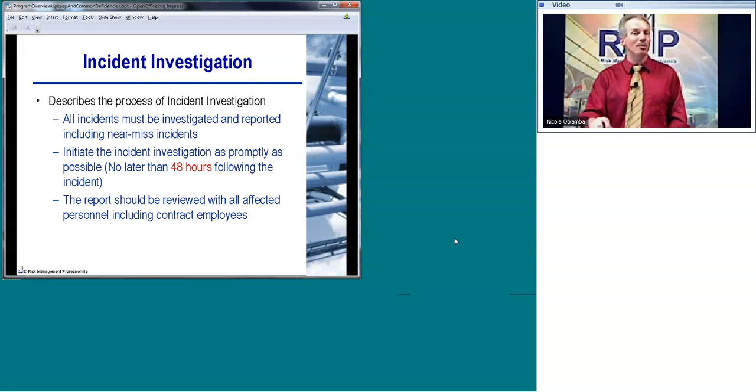Third bullet, the report should be reviewed with all affected personnel, including contract employees. Again, affected personnel, performance-based standard, you've got a lot of latitude to decide, but you have to have a basis for what you're doing. Examples of near misses, I talked about the relief valve. If everybody knows what happened in the Gulf of Mexico last year, if your blowout preventer actuation is necessary, that's not a normal type feature. You want to identify what's causing or what's challenging that. Fouling of equipment or repeated premature failure of controls and devices, those also could be near misses.

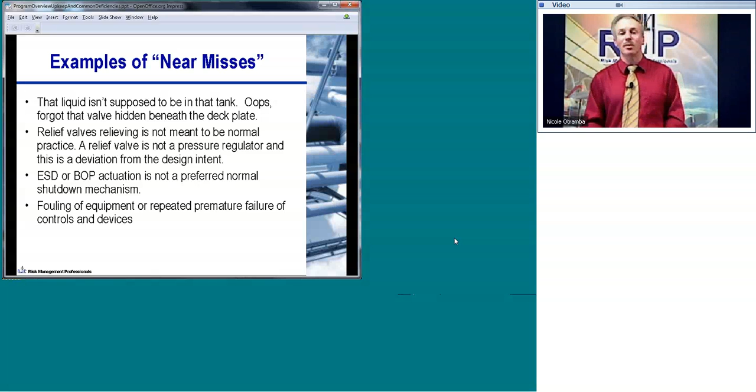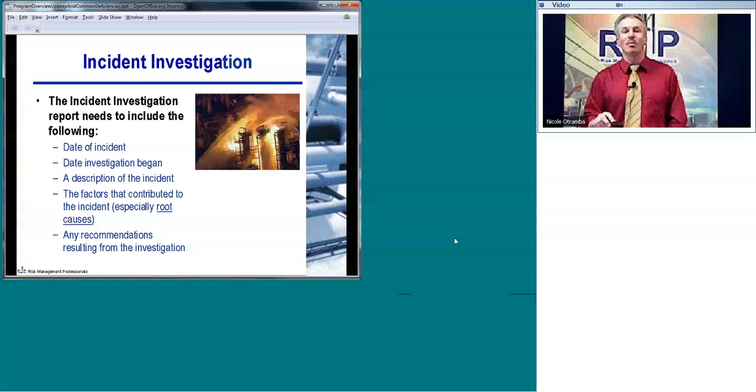Incident investigation, the report needs to include the date of the incident, when the investigation began, describing the incident, what factors contributed to the incident, and what recommendations may have come from the investigation. Common deficiencies, not doing the incident investigation correctly. You don't need to hire an expert, but sometimes an outside pair of eyes for serious events can be very helpful, and there are a lot of people who have various expertise and approaches that are very helpful.